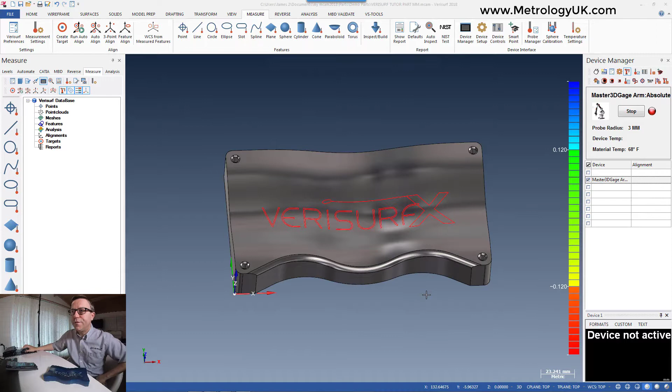So we've loaded the CAD model into Verisurf. Verisurf is our software package of choice. It has a universal interface that allows interfacing to any arm, any laser, any scanner, any CMM, so that you have a single universal interface.

So we've just loaded the CAD model of this part here, which is just a little demonstration piece, just to give you an indication.

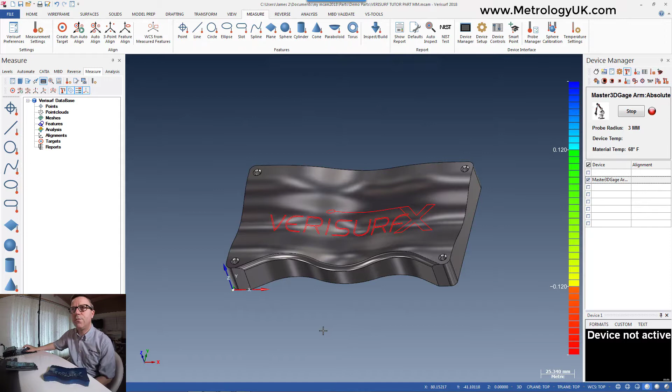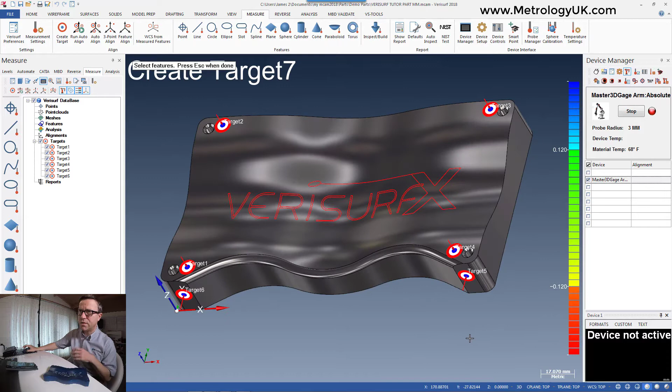The number one thing, we go through a 3-step process: align, inspect, report. To achieve that we have a very simple orientation of creating a series of targets on the actual CAD model itself that represent target points on the component. So we will go ahead and do that - just clicking on the surface itself, to represent what we call 3-2-1, which is the locking mechanism for traditional alignment processes.

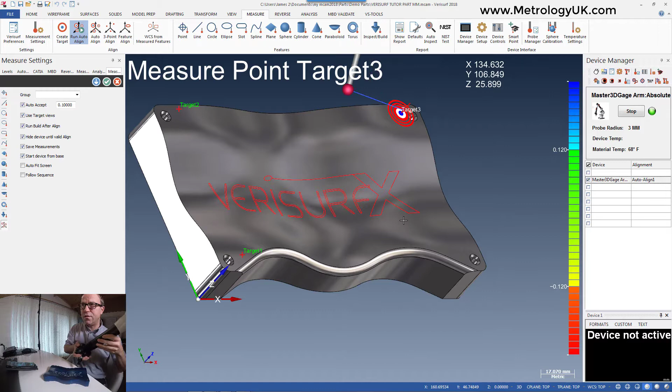It's as simple as then just running them and following the sequence. After the 3rd point, you get an indication of where you are, and then we've developed a method by which we can actually, after the 3rd point, take the points in any given order, which just allows additional flexibility. Let's just move the orientation.

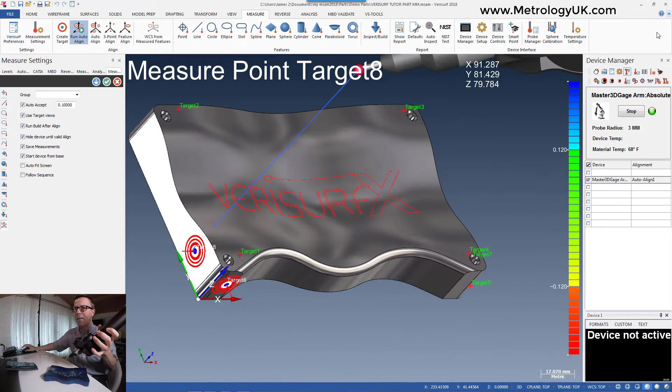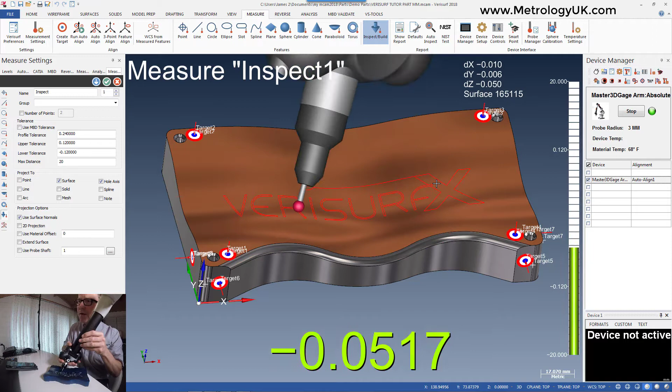So we automatically jump into what we call build mode. Build mode allows me to touch on any part of the surface and get real-time feedback about the deviations that we actually have. As you can see, we are sort of in the 0.1 mark here in this area. That's because the setup we have here is just for demonstration purposes, and it's purely just glued back here, roughly glued with a bit of Blu Tack. So we're not going to get a perfect indication, but it just gives you an idea of the process.

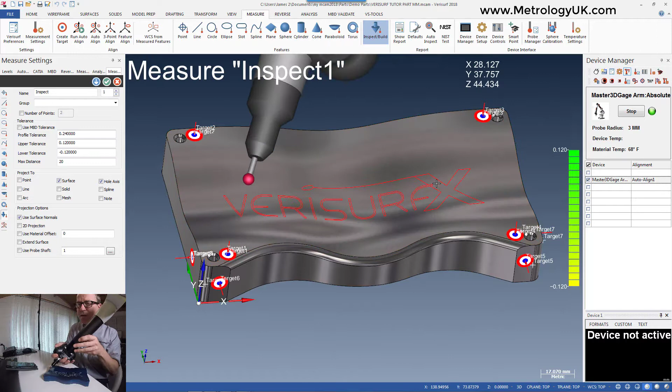So we can just take simple measurements, and the arrows indicate directionality of error, magnitude of error, and we can also make alterations to these particular settings.

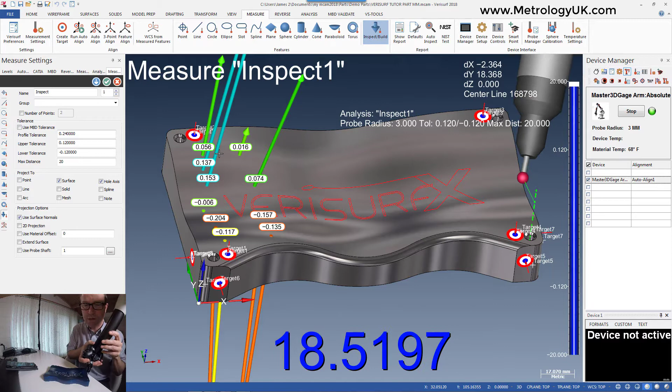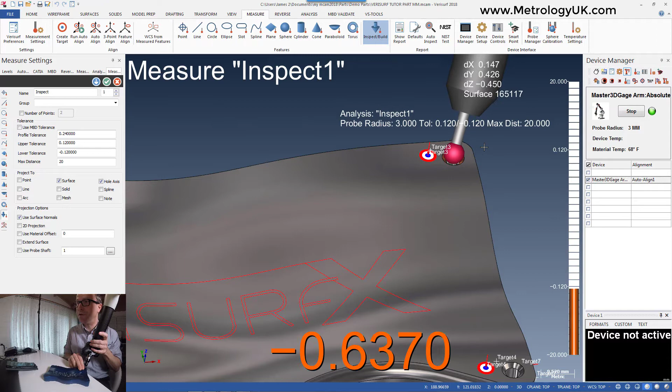We can also lock onto hole positions. Even though we're not directly in the hole, we can lock into the vector of a hole, which gives additional functionality. So you see here we're actually probing directly into a hole position, giving an indication of direction of error on any given hole just by placing the probe in the hole position - which is a really useful function if you're attempting to position a bushing or during a digital assembly, giving you an indication of error.

So what I wanted to do is just show you some additional functionality of the Master3DGAGE, just going through some of the detail of the specification.

The arm itself has a 20 micron volumetric accuracy, and that can be even better when actually getting into a component itself. So it gives a really good indication of the accuracy arms have got to at this particular stage. We've tested some arms and they're down to sort of 10 micron accuracy levels, with repeatability of 5 microns or so.

But I just wanted to give you an indication of how we can physically visualize and articulate the arm itself within the software, and that's a really good benefit to be able to see feasibility, etc. So I'm just going to show you here.

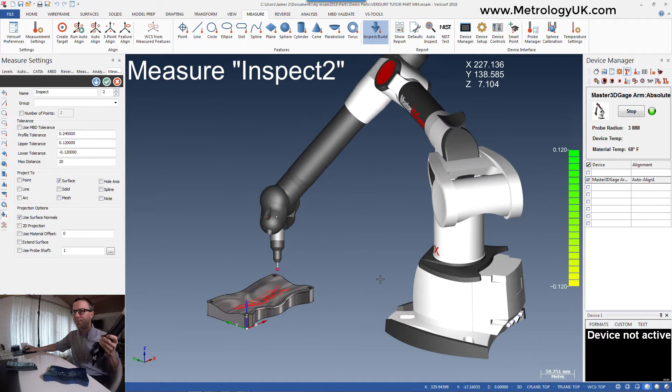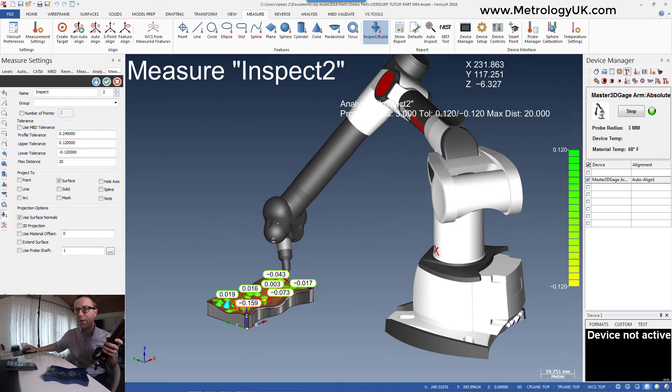We're just going to quickly show some of the color mapping functionality. This just allows us to take a series of singular positions on the component itself. And then when we've actually completed, we can do done, and then you see we actually get a visual color map just from singular point positions. So that's a really neat function.

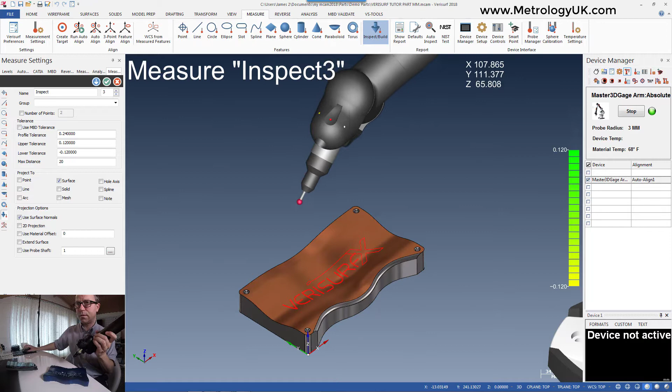We also have continuous mode, so that allows us to go into single - just click in here, go to continuous mode, and maybe I'll just set this. This allows us to stream data back and forth directly from the device.

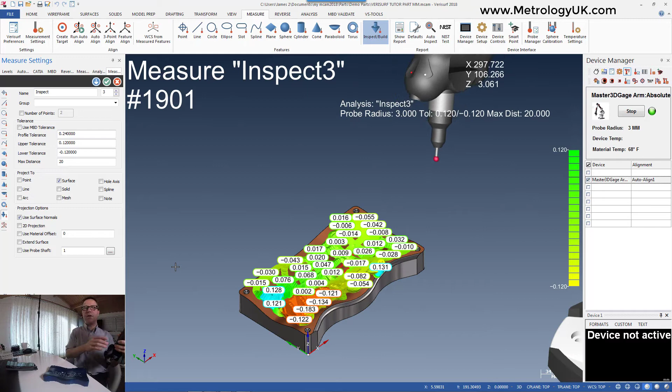The sounds you hear is basically us hitting the limit, sometimes occasionally hitting the limits of the device itself, which just shows you when you get towards the periphery of the working volume, which is good to actually know.

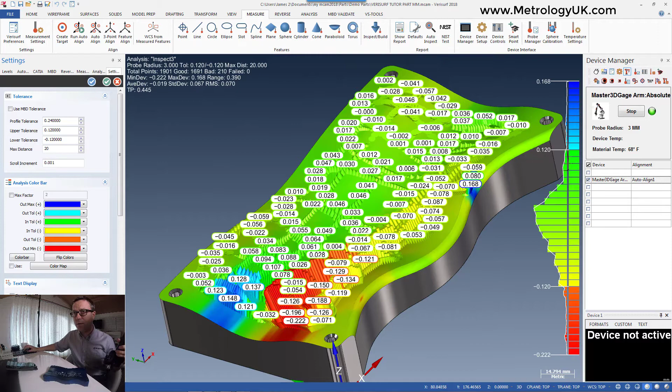As you can see, we get this really great indication of where the localized error is. We can illustrate that with vectors and color maps, so we can go in and directly alter how we visualize things. We can turn off the deviations, so we can see it in those terms.

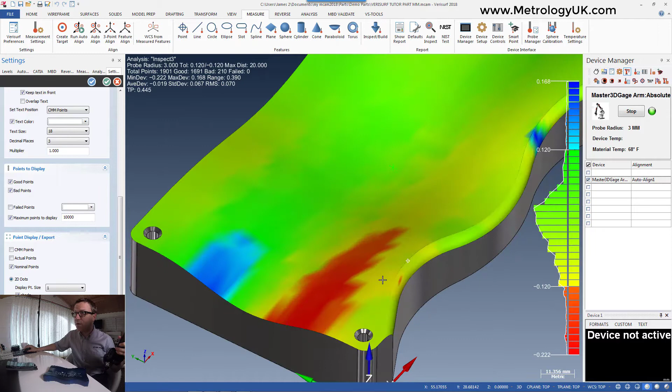The negative arrows above the job looking down indicate the direction of the arrow itself. We can obviously turn off the arrows if need be—some people don't like to see those—so we can just look at a physical error map, which is really useful to indicate where your error on your component is.

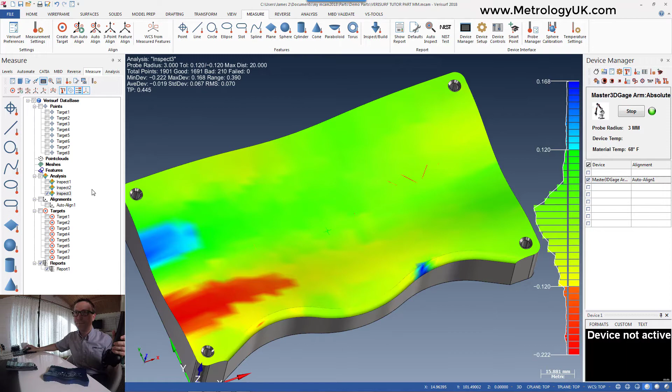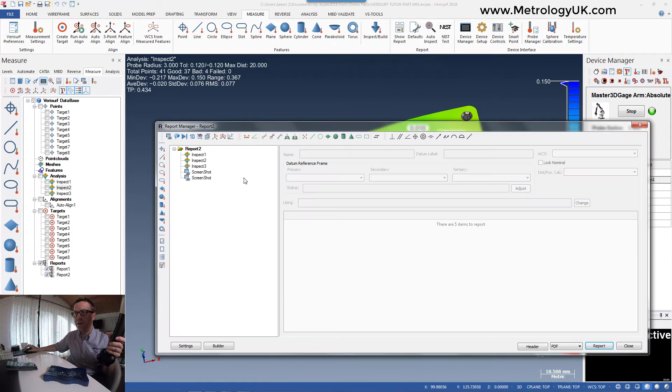Once we have a particular inspection we want to illustrate within a report structure, we can take those objects directly into our report manager, add individual screenshots showing the particular error associated with the measurement we've done, so you can get different graphics to illustrate different particular characteristics. Let's say we want to illustrate this particular region.

We can drag these into position—everything is drag and drop within Verisurf, which is really good for functionality—and then literally create report titles, etc, and off we go.

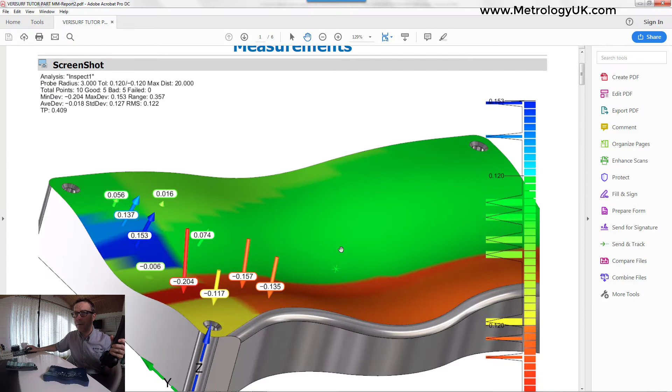So we just want to create a quick report. You can see we got pass fail, and then it's just in profiles, because we set this for a plus or minus 0.12. You can see we're just failing, just obviously with the setup that we have.

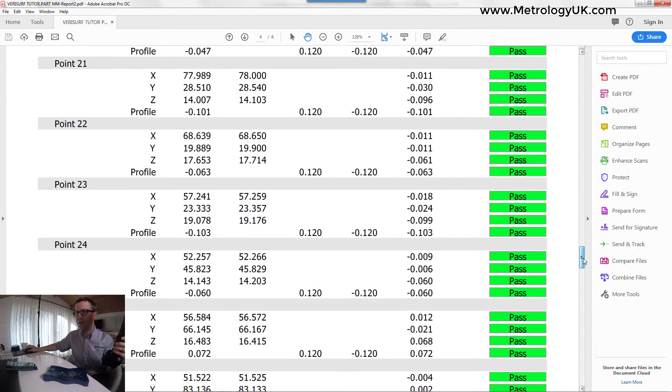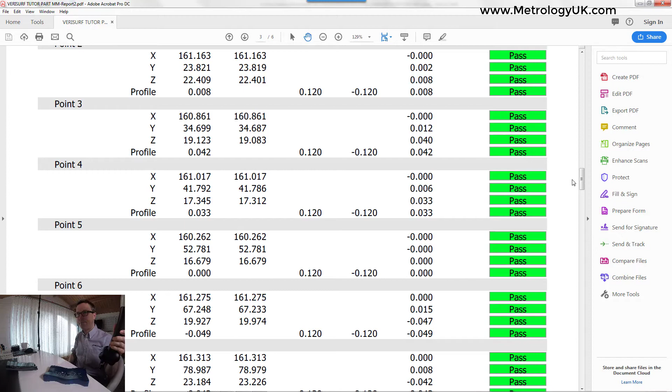So obviously this is the scan data. Okay, so that just gives you a little bit of an indication of the Master3DGAGE align, inspect and report within minutes.

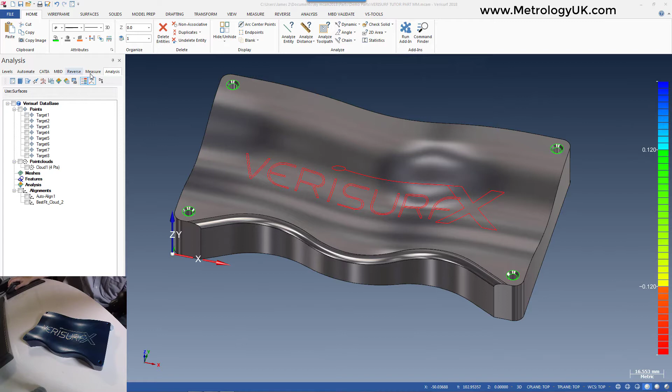So I wanted to illustrate the capability of the Master3DGAGE with Verisurf for reverse engineering purposes. We were going to recreate this complex surface using the scanning mode, and just wanted to surface through that data. So I'm going to collect data in a single point and then go to a continuous mode.

That allows me to basically take the shape of the form itself, and it allows me to scan data across the part. I don't have to take it in an organized manner, but just need to collect enough to define the physical contours.

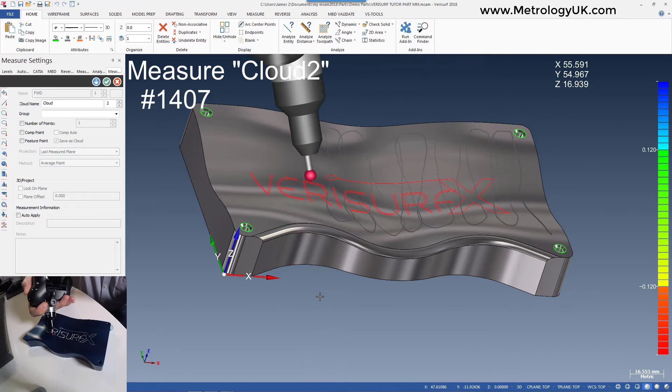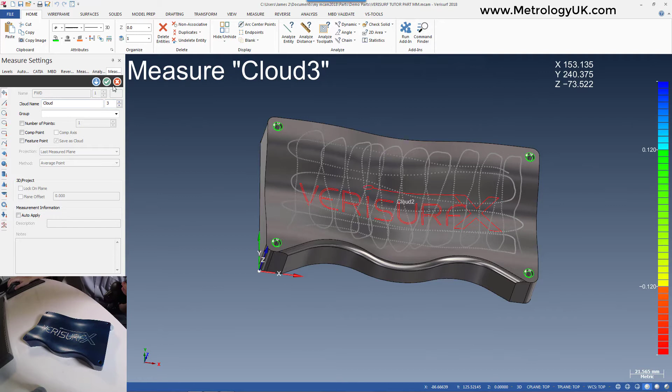Okay, so we've taken a bit of a random sample, not too much data, but it gives you a bit of an indicator. I'm going to now take that data set into the reverse module and go to surface patch, which is a module that allows us to create sort of lofted style surfaces from straight point clouds.

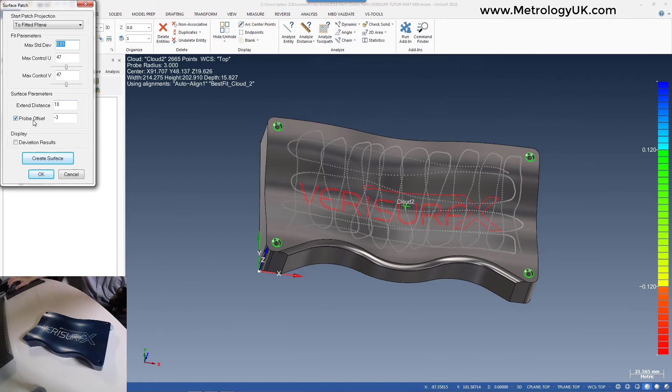What we can do is extend beyond the measurement for modeling purposes, and also offset automatically for the probe radius, because obviously this is probe center data, as you can see. Right, so I'm just going to create the surface.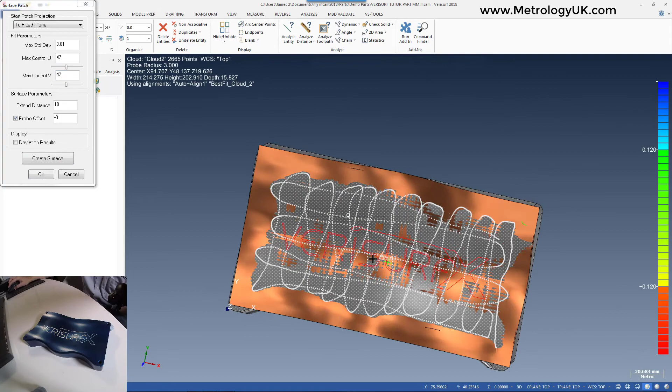You can increase the accuracy by increasing the UV control. This will make the surface tighter to the original data set, and as you can see, it's recreated the surface and mimics the original surface, so that gives you a little bit of an indicator of the accuracy of the process.

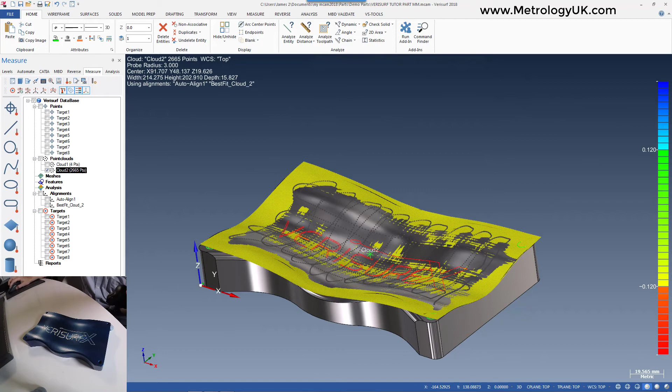What we're able to do is actually verify our reverse engineering by highlighting it, entering into the build and inspect mode, and then physically check our reverse engineering for accuracy levels. And as you can see, within a few microns we have replicated that surface.

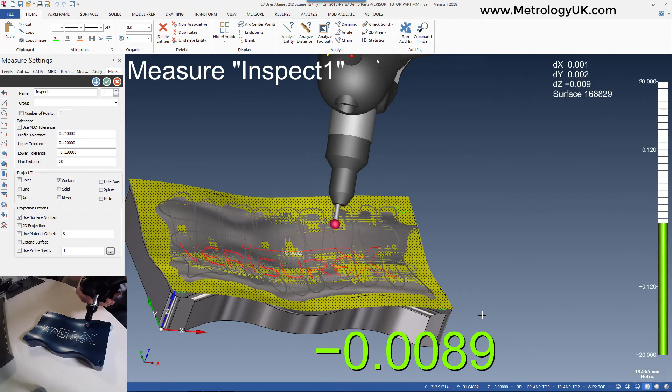Where the data doesn't match, maybe you need to collect more data, but it just gives you an indication of the quality of the reverse engineering process. So that is basic reverse engineering with the Master3DGAGE and Verisurf.

The Master3DGAGE and Verisurf is a great addition to any manufacturing company. It's a great asset to quality departments, people dealing with NPI, and your engineering teams for exploring initial components, in-process controls, and on-machine verification. So it's a great addition to any company looking for such a three-dimensional digital measurement device.